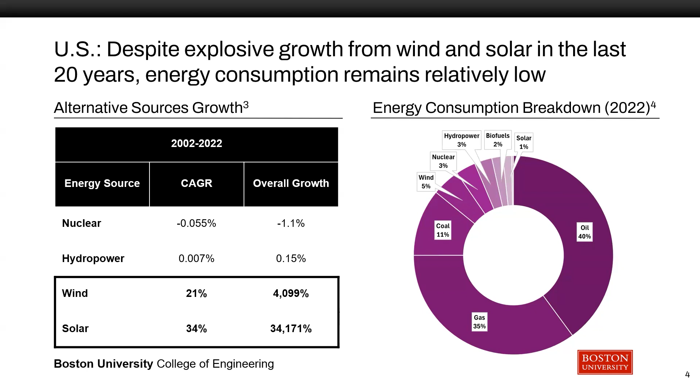Just to give a brief introduction here, the way that we decided to analyze wind and solar was to create a table that basically ranks their adoption potential. So first we looked at wind and solar together and we said, what's the overall importance of this resource to be able to contribute as an alternative? We gave it an importance score of 1 through 3, with 3 meaning this is really important - it needs to be cost effective, such as LCOE, or levelized cost of energy.

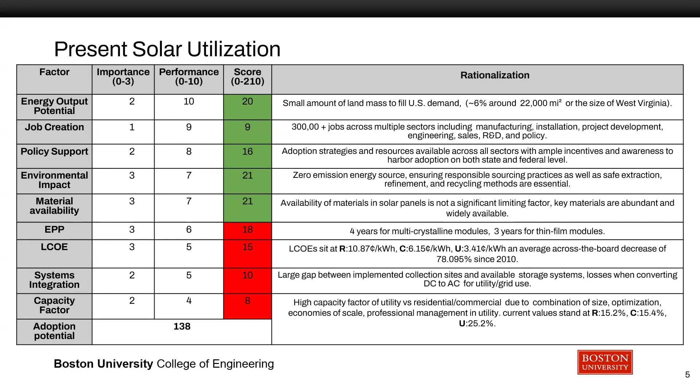Then we rated wind and solar individually based on their performance. They received a score 1 through 10 that basically explained how well they excelled in that area. If it was very cost effective, it would receive a 10. If it had bad job creation, it would receive a 1. So essentially going through these factors for solar, we ended up giving it a score of 138.

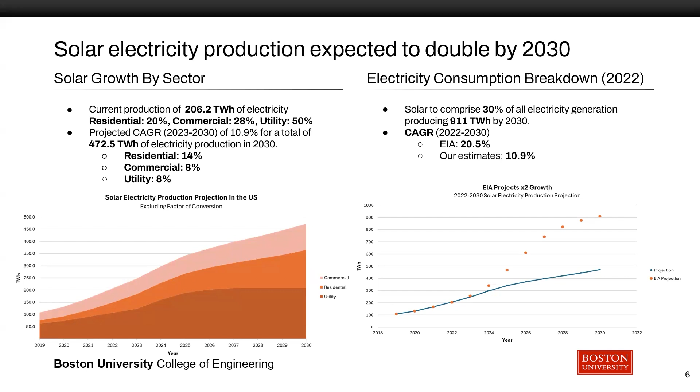Advances in technology have increased the capacity factor of wind turbines and enabled us to build turbines with longer blades and smaller generators. By producing power at a lower specific power factor, we're able to more often maximize these generators and achieve a higher capacity factor. Producing a more stable power supply this way makes the cost of electricity cheaper and also enables us to place wind turbines in locations that don't receive as much wind.

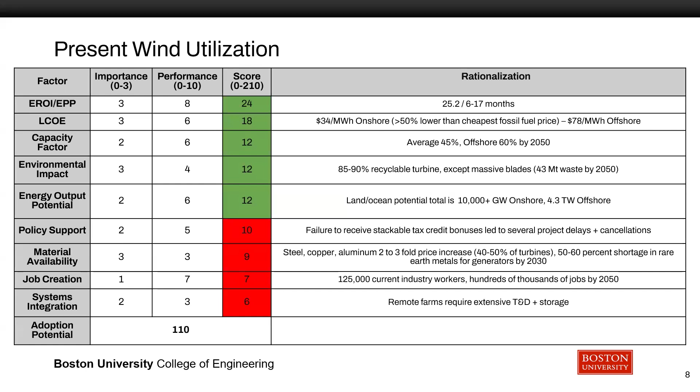One of the biggest challenges moving forward is the high price of materials for wind turbines. Copper and steel are very expensive and in recent years have seen 2 to 3-fold increases in price. This has led developers to not be able to manufacture affordably, and not being able to do so has also prevented them from receiving important tax credits from the Inflation Reduction Act, which requires them to domestically manufacture their materials. So not receiving these bonuses and the sum of these factors leads me to give wind a score of 110.

Here we can see that through our projection for wind energy production, it should reach 20% of overall electricity production by 2030. We expect a 7% compound annual growth rate for wind, and that will require 5% growth for onshore wind. But overall, offshore wind will need to grow 34%. This is a significant amount. Currently, we only have 110 megawatts of offshore wind installed, or 0.11 gigawatts of that 30 gigawatt goal for 2030.

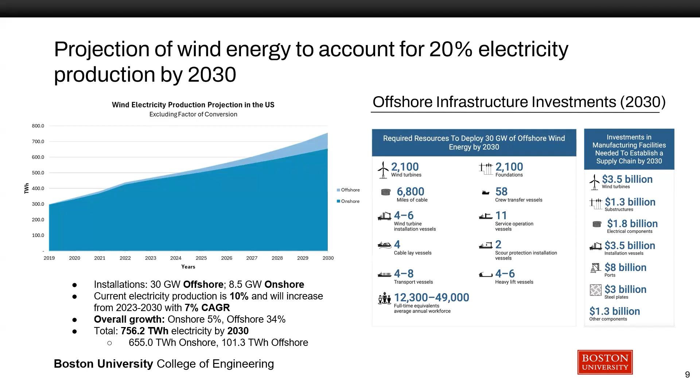Significant investments will need to be made not only in turbines, but also in how do we install them. We need to build wind turbine installation vessels, the first of which is just being finished in the US today. It's taken 4 years to build and roughly $800 million. We'll need 4 to 6 of these in order to reach our goals by 2030. Otherwise, foreign developers have to operate from their faraway ports in places like Europe and use offshore barges due to legislation that prevents foreign ships from operating in US ports. So we can see this is a pretty big challenge for offshore wind.

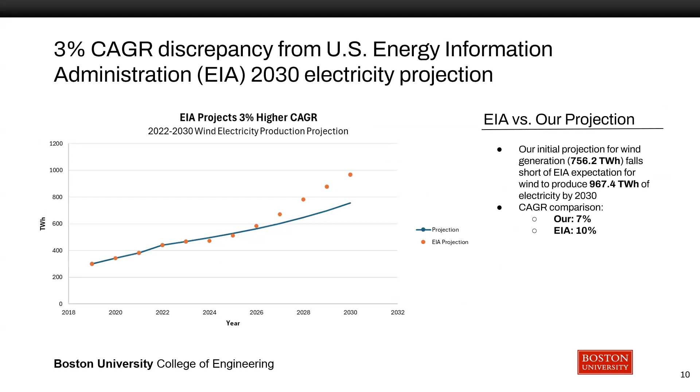However, like we showed with solar, there are challenges or differences related to what decarbonization goals have in mind set by the EIA. We can see here that there's a 3% higher CAGR when we compare what the output of electricity should be by 2030. So again, we've actually adopted this model to say, is this the rate that we need to grow at in order to reach our goals? We can see that with this growth, wind will only account for 7% of our overall energy consumption by 2050, even as we explode our growth from now until 2030 and steadily as the industry develops, continue to grow until 2050. The way that we created this graph, just to preface, is that we compared the output from resources such as wind and solar to the input of primary energy inputs or resources such as fossil fuels. We took into account their thermal inefficiency and multiplied by a factor of 2.5 in order to compare both as thermally inefficient inputs in terms of terawatt hours.

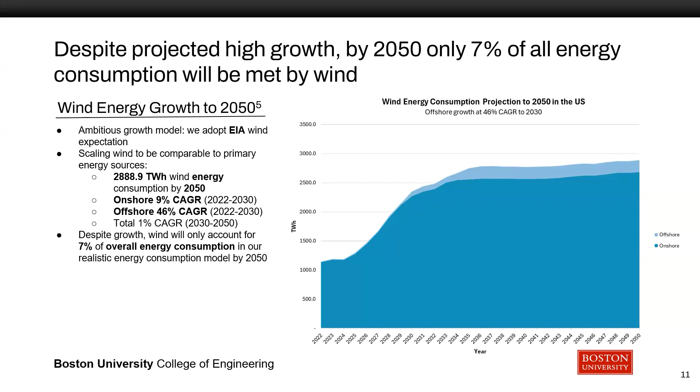This comes into play, and this is really also a definition of how the US policymakers have tried to orient this kind of resilient energy production in the US, let's say. It would really be a bad look if you would essentially extract your uranium and plutonium from Russia, Kazakhstan, or Uzbekistan. You can also do it from Canada or Australia. But this is really kind of a willingness from the policymakers in Washington, and they wanted to push harder, let's say, on wind and solar. So this is a consequence of this, but also a consequence on the engineering.

In our roadmap, we can predict much better how much one wind turbine produces, how much one solar panel produces. This is why we've chosen to orient this roadmap and discussion more on solar and wind. However, I could sell you SMRs and fusion and tell you it's going to revolutionize the world, but truth is, we don't really know how they perform. Even experts are hesitant on what you can get out of these. So we decided to focus on what we know and could predict more easily. This tells you what's the state of the US and what's potentially not going to grow in fission. But Oscar has done some predictions on fission that he'll present after.

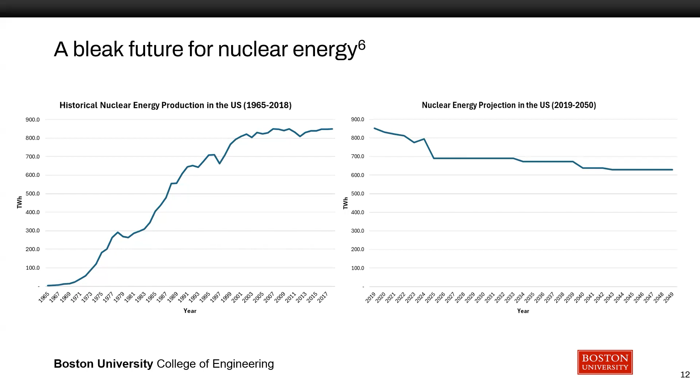So now let's talk about hydropower. Like Quentin already said, similar to nuclear, we don't necessarily see it as something that's definitely going to be a focus in the future. In this case, we're still going to talk about it, and also the reason as to why.

Mainly, as of right now, 3% of the energy consumed in the US is hydropower, which is more than solar and biofuels combined. Along with that, prior to 2019, in terms of renewable energy produced, it was the most in the US, until it was surpassed by wind in 2019.

Now speaking as to why it's not going to be necessary for the future, there's actually expected to be a decline in energy generation from hydropower, mainly because we've already used most of the suitable locations in the US. If you look at the graph on the right, you can see a cluster of them in the northwest. As a result, the largest amounts of energy that can be generated in the US have already been used, along with the technology being simple.

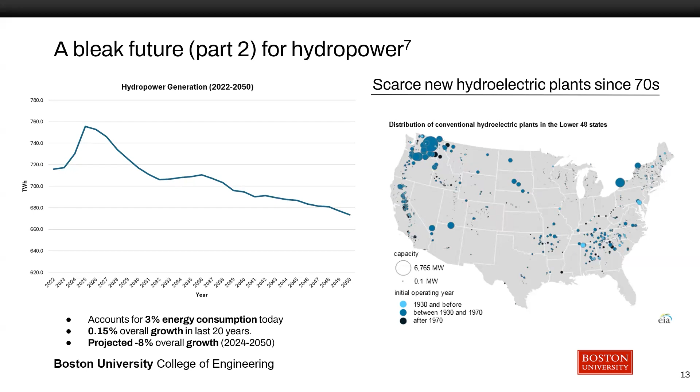Now we're going to speak more, putting back everything together. We have solar, we have wind, we have nuclear, we have hydro. But now let's go back to fossil fuels. This graph shows the projections in the future: negative 1% total growth, so a decline. That's including coal, gas, and oil.

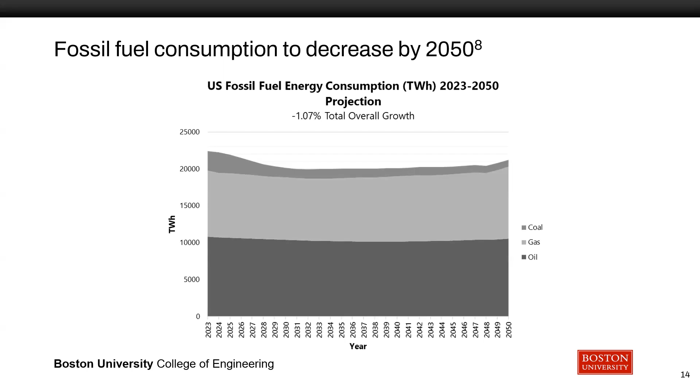Now I'm going to pass it back to Oscar, who's going to put all these things together and put it more into perspective.

Thank you. Really, this graph to your left is the compilation of all the energy sources we've mentioned. The yellow is what Uche presented in terms of fossil fuels. Then these are the projections to 2050 for each energy source we've talked about: wind and solar, Quentin with nuclear and hydropower, Uche. So this is the projection we've come up with, and it's seconded by the EIA in terms of overall growth expected, which is 18% to 2050.

Now, it's still very obvious that we're going to rely highly on fossil fuels. 69% of our energy consumption will still come from fossil fuels by 2050. The interesting thing is that this is not even a realistic growth scenario, because the truth is that as a world, and particularly the US, in the last two decades specifically, has grown at about 1.9% year over year. This does not reflect that growth.

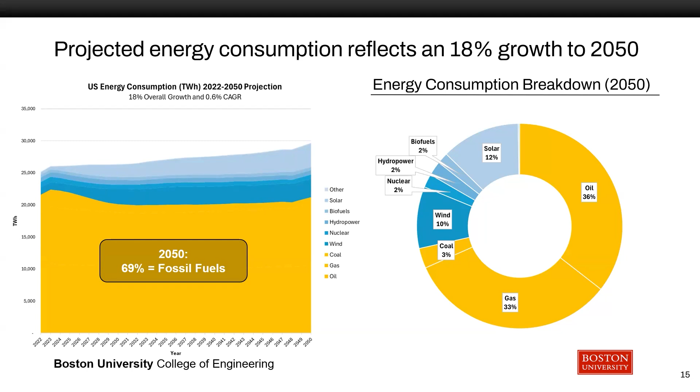And so if we account for it, and we assume that these are optimistic growth rates from the alternative energy sources — wind, solar, hydro tapering off, and nuclear as well — then we're going to need to go to the bank and ask for more fossil fuels in order to grow at the rate we are projected to grow. This is an alarming fact.

However, some may say, well, what about nuclear? Nuclear is very promising. Countries like France, as you mentioned, are using it, other countries are adopting it. Why aren't we doing it? What would happen if we did? What would happen if right now we put all of our research into it?

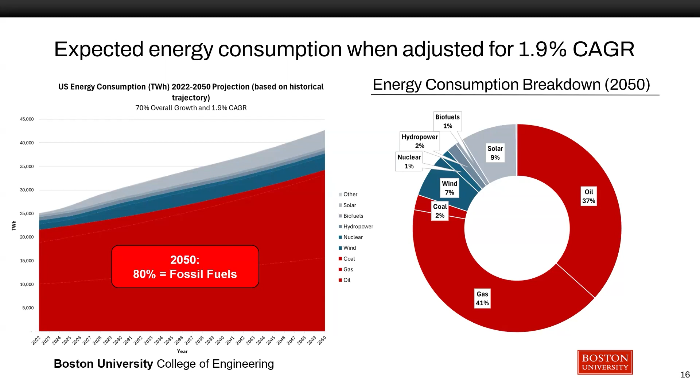So we did a case study on this and said, okay, what would it take for us to have the same graph that we have here — the same amount of growth, but we need to grow 1.9% year over year, this is what we expect. What would it take for nuclear to take up that amount such that fossil fuels still do not grow?

These are very back-of-the-envelope estimates, but it would require around $4.5 trillion, and that's a low bar. It could be double or triple that, just to build about 1,500 nuclear reactors, which, as we know, there's less than 500 worldwide, which is an unrealistic fact to begin with.

And this growth would be starting in 2030, which is very little time to build a nuclear plant. You need decades for that. And even then, even in this unrealistic scenario, we would still depend mostly on fossil fuels in this country, 53% of our energy consumption from fossil fuels.

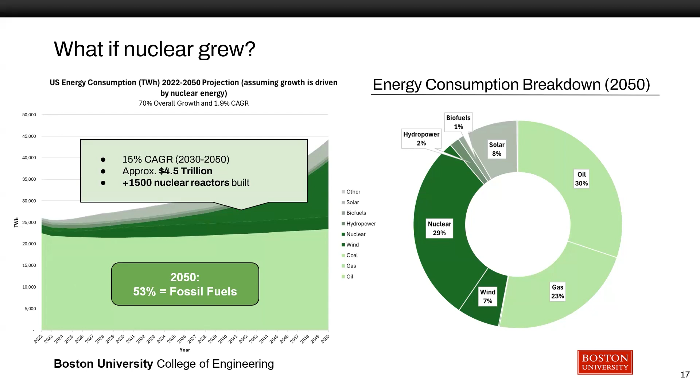And so there's only one question left, and that is how much time we have left if we keep going on this path. So what we did here with this graph is take into account the reserves of fossil fuels we have, and what we're doing in terms of energy.

We know that the US consumes 16% of the world's energy, and what we assumed here is that each country's portion of that consumption will remain the same. What we assume is, what would happen if every country grew like the US, consuming like the US going forward at their own respective sizes?

We find that indeed, like the Energy Institute predicted, we would run out of specifically oil and gas by the turn of the century—a little after what the Energy Institute projected.

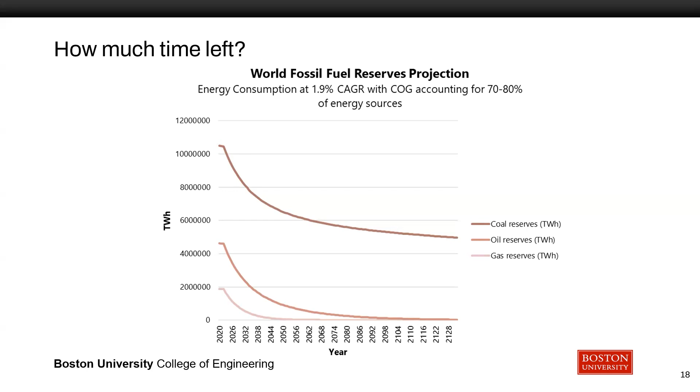So to summarize, despite the explosive growth of wind and solar, even in an unrealistic scenario where nuclear fission would come in and contribute a lot of energy, by 2050 we will still be highly reliant on fossil fuels. In our realistic growth scenario, we predict we will still rely on fossil fuels for about 80% of our energy consumption, which will lead us, if the rest of the world follows, to probably run out by the turn of the century.

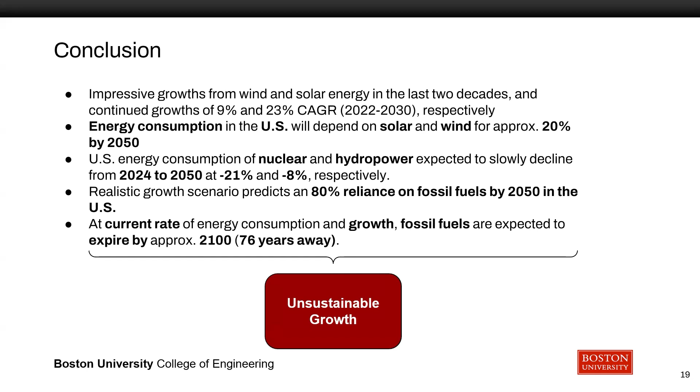But really, the takeaway message from our group is this: we are on a path of unsustainable growth, and it is an issue we will face in our lifetime, and most certainly our kids will face in theirs, if not their grandkids. So we provide the diagnosis, and what we hope is that the next energy transition team can start looking for answers to the question: how do we avoid disaster? Thank you.

That was less on the theoretical side, because it was all going to be based upon whether the technology could actually be developed to the point where we can make some sort of impact. So we decided to focus more on the current ones where we can see actual technology and a lot more growth, and as a result that's what we focused on for the presentation.

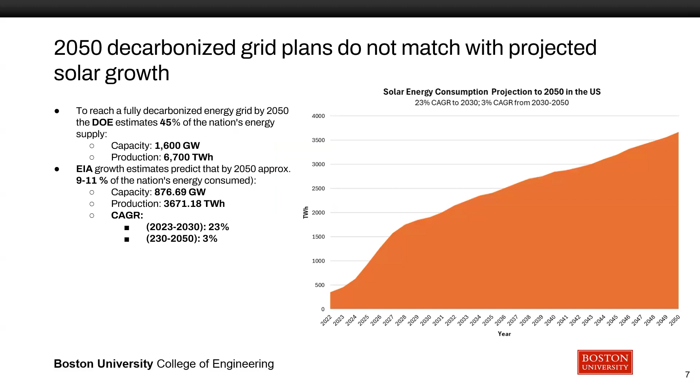I would say that initially, when we were given this project, we were asked how should we go about it. Our first thought was, should we go into different sectors? Should we go into transportation? Should we go into heating? Should we go into electricity? But instead, we just focused on energy as a whole and different sources for providing energy and electricity.

We imagine, and other roadmaps imagine, that the grid in the future, or our power sources in the future, will become more electrified, with more electric cars. How are we going to have the power sources to provide for that? So we didn't necessarily take the time to diagnose what we'd call now a climate change problem or an emissions problem. We chose to focus more on energy sources and how far they could take us for electrification.